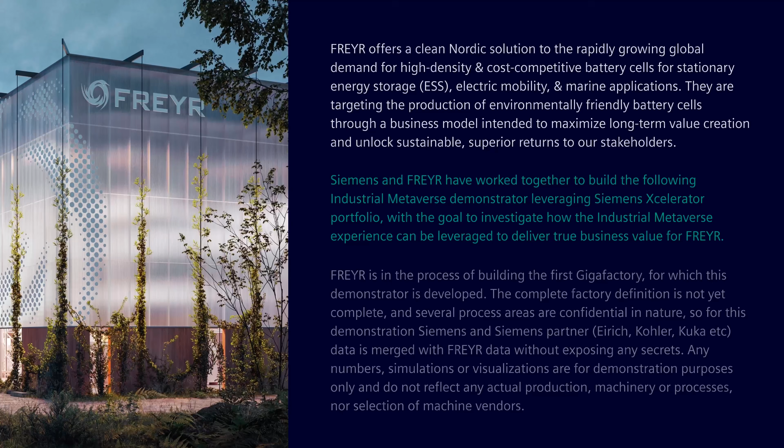Siemens has developed a showcase to demonstrate how the industrial metaverse can help manufacturers collaborate and work in the future. In collaboration with Freyr, a Norwegian clean battery producer, Siemens developed an industrial metaverse experience based on their first Freyr Gigafactory.

The process began with importing physical and digital data sources to the Siemens Xcelerator platform and leveraging IoT TwinMaker from AWS and the NVIDIA Omniverse to create this Xcelerator industrial metaverse experience.

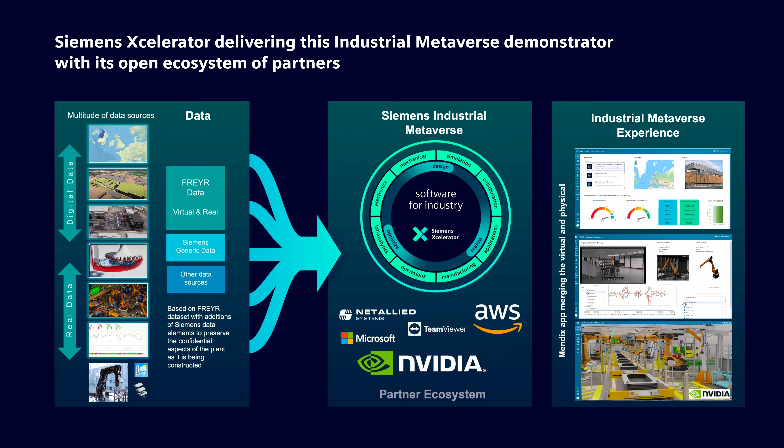There are many ways for Freyr to use this industrial metaverse experience. In the first example, Freyr executives use the industrial metaverse to sell a plant to prospective investors, giving them confidence in the proposed design through the ability to interact with a fully functional operational model of the plant.

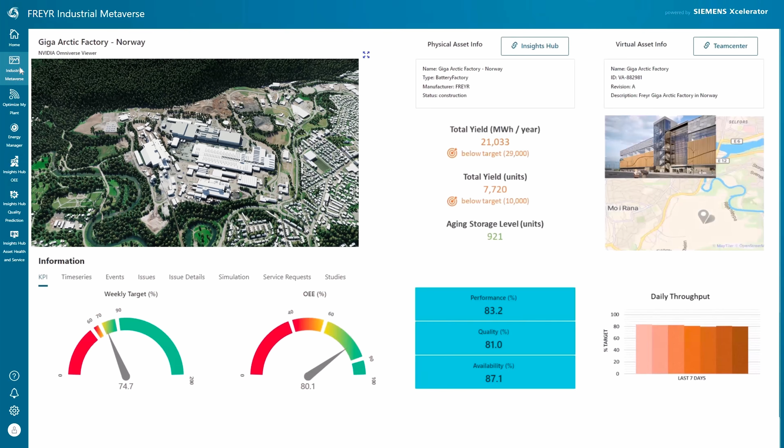Users can browse the location and status of plants across the globe at different levels of construction. Operationally, key KPIs and information are displayed for each plant.

For example, when the Giga Arctic factory in Norway is selected, it is easy to see greater detail about the plant, including geographic information and the surrounding terrain.

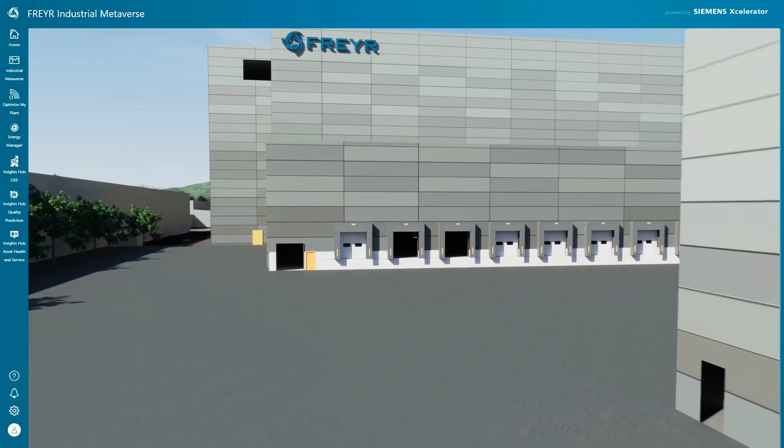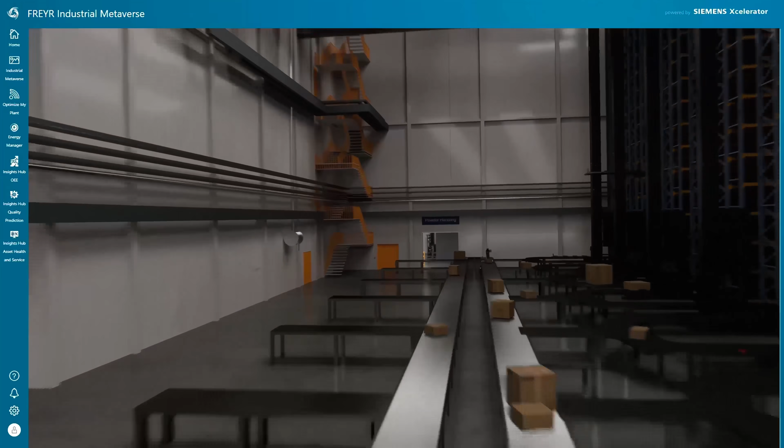This is a fly-through of the plant, starting in the material bay. Slurry mixing. This is the most critical process area.

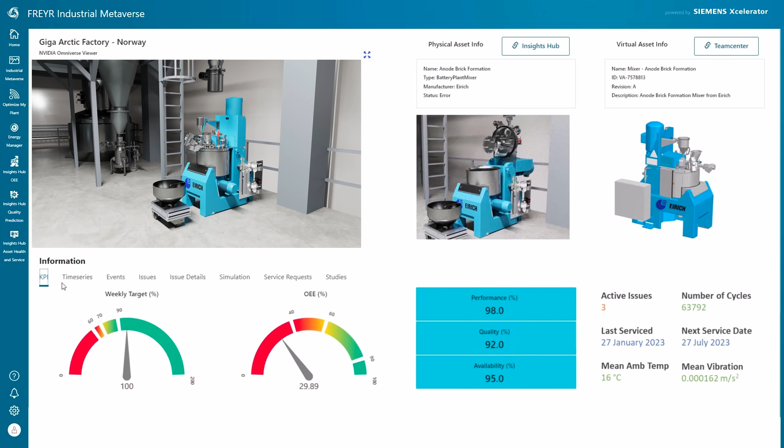Each of these assets is connected to the digital twin, so all aspects of the equipment can be simulated. Key information, including critical KPIs, real-time series data, issues, service history, and requests, are available for each piece of equipment.

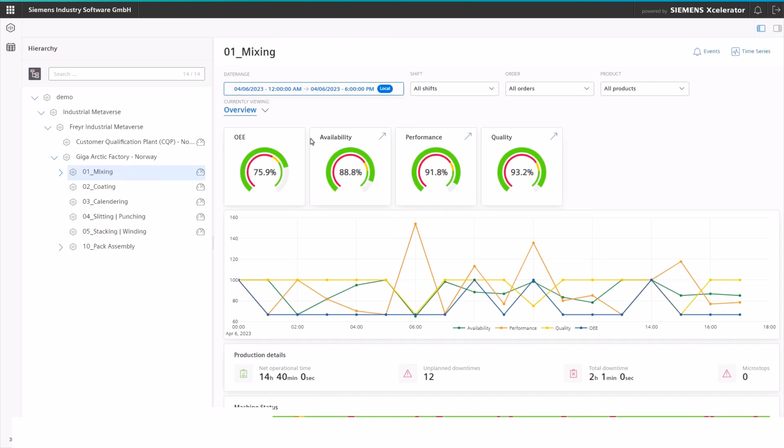This includes the ability to look at OEE information to understand current operational performance, availability, and quality, as well as to understand the overall performance or make predictions about future performance.

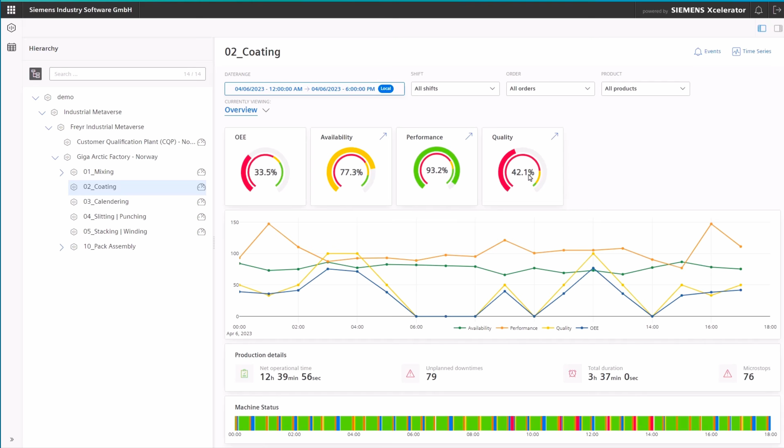The Quality Prediction Hub allows production managers, quality and manufacturing engineers, and operators to better understand the complex relationship between production machine parameters and the resulting product quality.

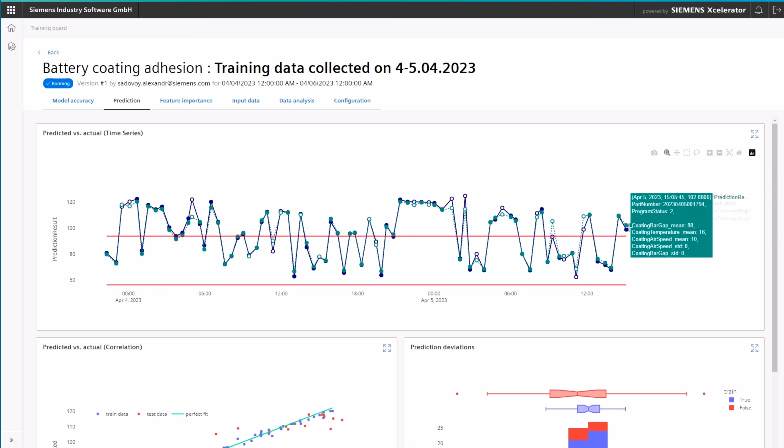With real-time input of actual manufacturing parameters, we can apply machine learning techniques to automatically predict resulting product quality characteristics before a defect and quality loss occurs.

Mixing is a critical process, so leveraging the digital twin to optimize all aspects is essential. This high-fidelity simulation of the laminar and particle flow of the mixing process is leveraged to optimize the stirring process.

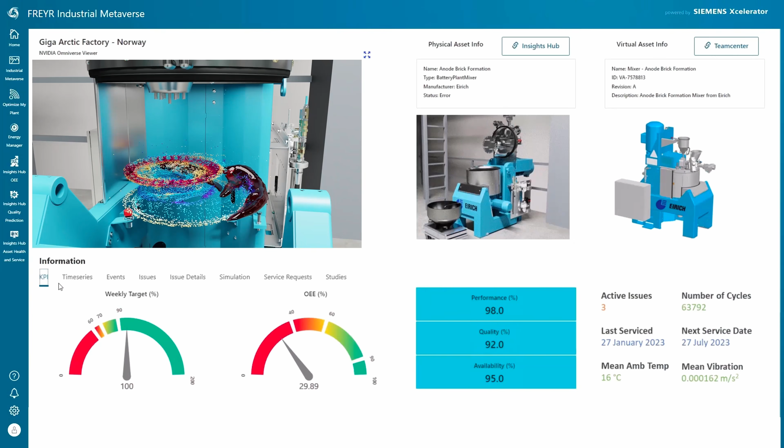In the Industrial Metaverse Showcase, we can engage with any asset to understand the operational performance or what process it may be performing. This robot, like any asset, includes many data sources as part of its digital twin.

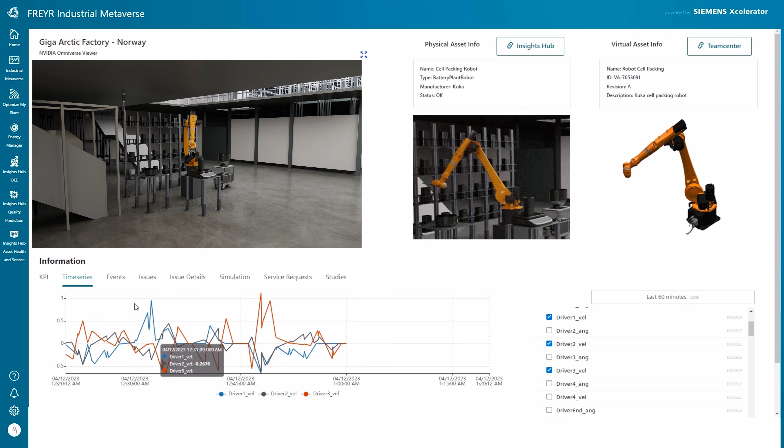This can be used to dive into the performance of the main control drives, identifying anomalies and service requests, or schedule maintenance. This showcase demonstrates how in the industrial metaverse, users will be able to make the best engineering decisions

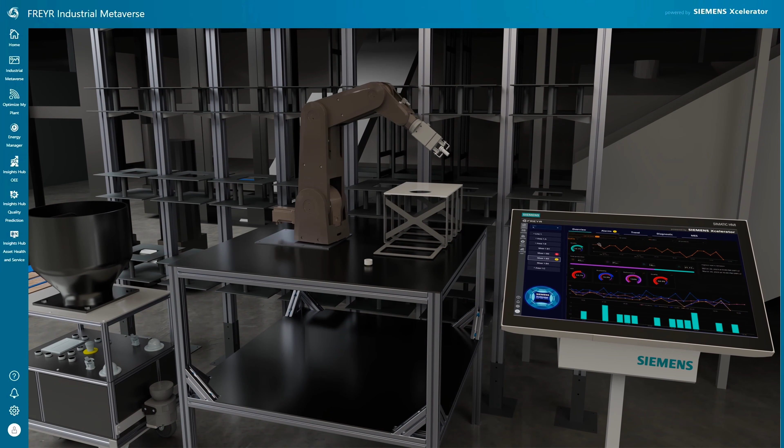because of precise, accurate, up-to-date information. For example, a service engineer may want to understand the detailed digital design information for this robot, including the bill of materials and detailed 3D design information.

In the industrial metaverse, this can be explored not only from a mechanical perspective, but also electrical and software, even down to the tolerances of the machine.

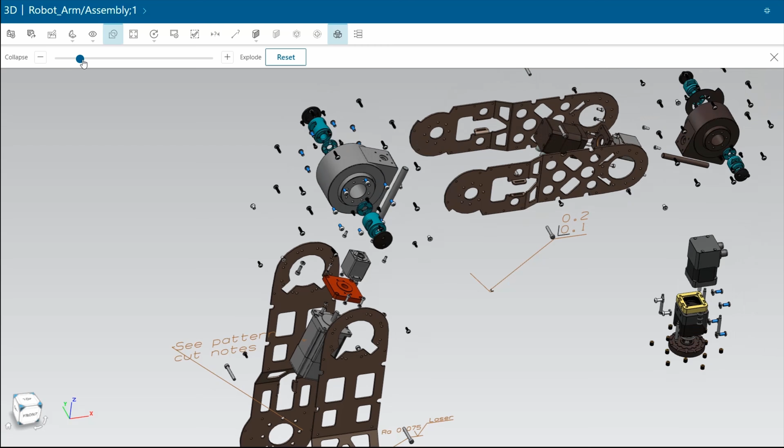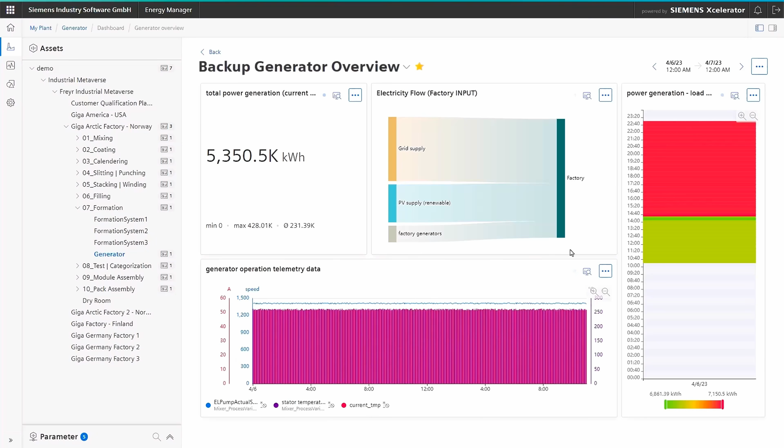This is an emergency backup generator. The Energy Manager dashboard allows quick access to generator metrics, the overall share of the generator to the whole factory consumption, as well as telemetry information about its condition.

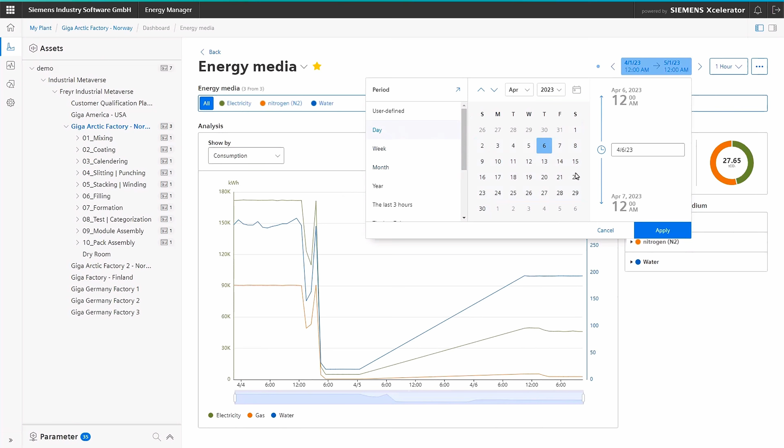The flowcharts depict the energy flow across the factory and from the share of supply to the individual departments. It is clear where most of the resources in the plant are being consumed.

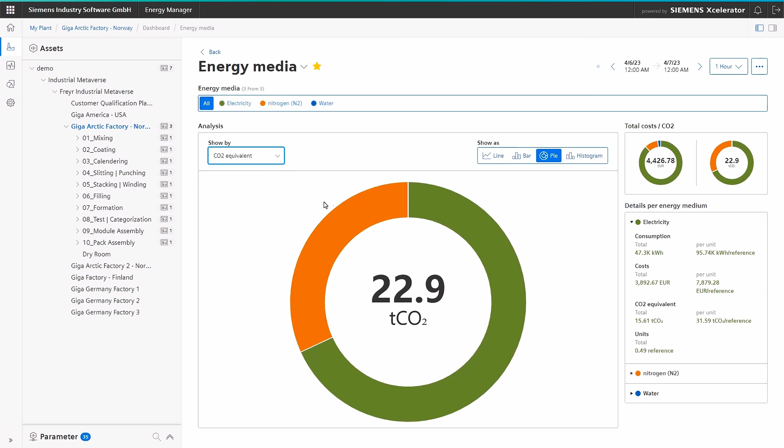The Energy Media reports enable users to better understand what resources, over time, are being used by equipment in financial terms or CO2 equivalents.

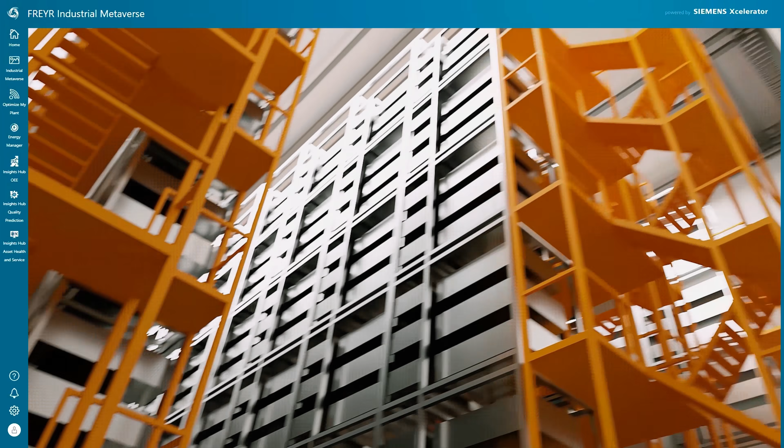Passing through the aging area, onto where the battery packs will be assembled. This area was added by Siemens for demonstration purposes, as Freyr has not yet finalized this area.

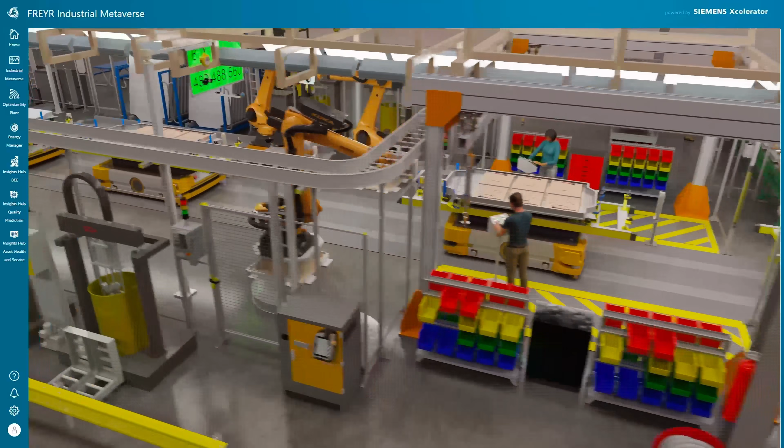The digital twin drives the precise orchestration of each robot, each cell, and also how they interact in harmony across the entire line.

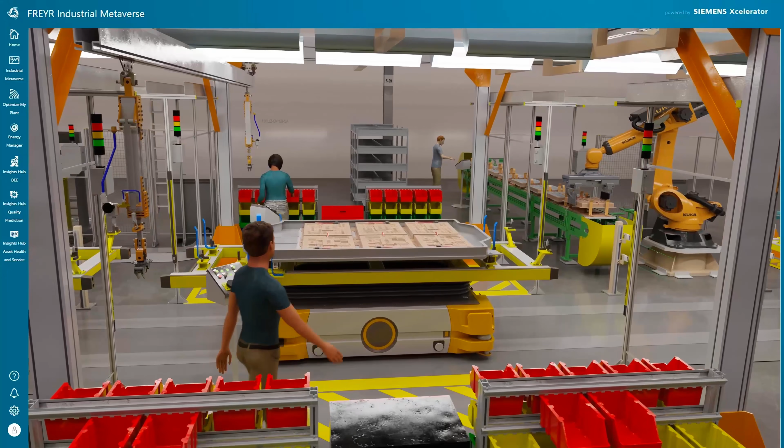Digital twin behavioral models are not restricted to just machines and processes, but can also be used to optimize and validate human interactions and processes. And these can be used to simulate or optimize for safety or performance.

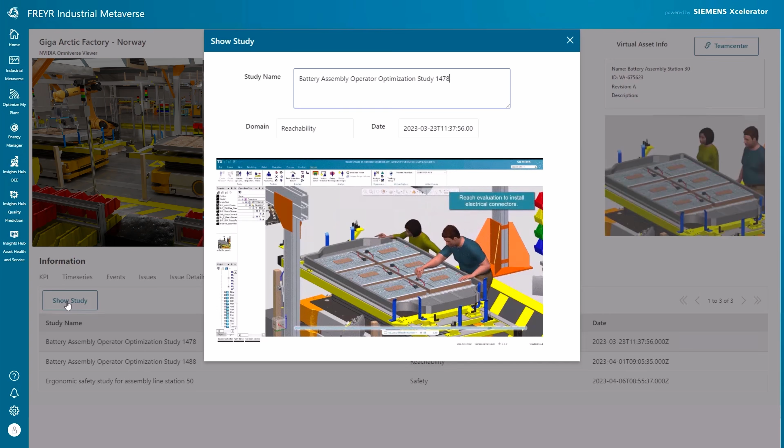Using true physics-based human models to optimize tasks and working environments enables use for training and documentation.

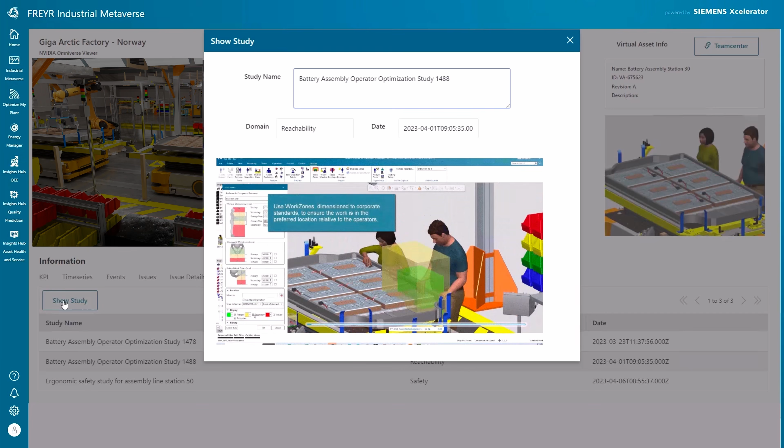Siemens is excited about the potential for the industrial metaverse to improve how we design, collaborate, and manufacture products.